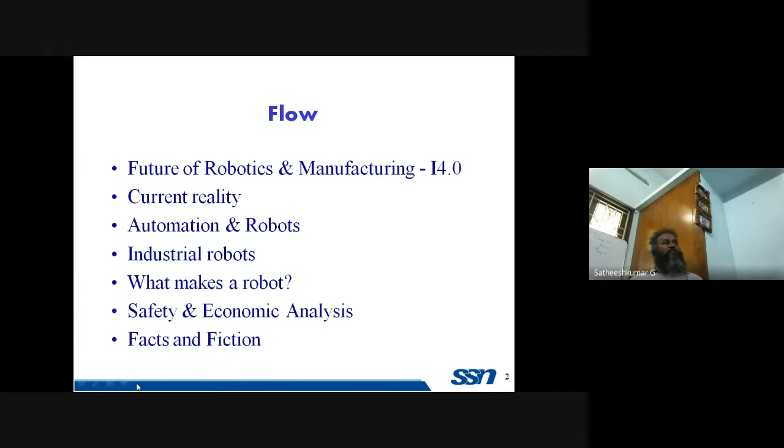Industry 4.0 is the fourth stage of the industrial revolution, which started approximately 200-300 years before. Starting with steam power, we moved on to electric power, then powered by electronics and computers, and now we are at the stage where the internet plays a role in everyone's survival.

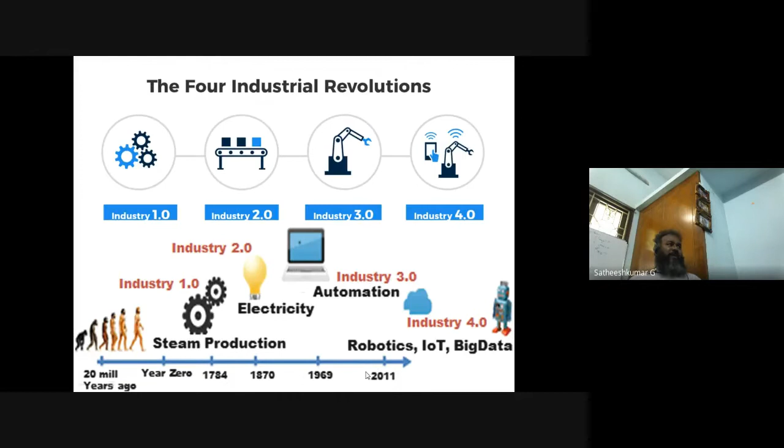That is where Industry 4.0, with IoT, robotics, big data, are going to have a real showtime for these domains. It all started like this—it might even have started even before, that's what they say, but at least 1784 could be considered the starting point of the industrial revolution, and it is extending further beyond now. So what are all the pillars?

They say 9 pillars, 10 pillars—you can have any number of pillars that you want. What I want to point out is you have advanced robotics also. Autonomous robots or advanced robots are considered to be one of the major pillars for determining the success of Industry 4.0.

You will have other things like Internet of Things, big data, machine-to-machine communication, 3D printing, cloud computing. You'll be hearing more and more of this. Of course, your syllabus with which you are studying the subject may not have all these things in place, but 60-70% of this content has to be covered in the next 4-5 years, so that you will have basic knowledge. All engineers who pass out of engineering should have basic knowledge in all these domains.

That is a must. Talking about autonomous or advanced robots, the robots can be fixed or mobile, moving around. If it is going to be moving around, it can be aquatic, inside water, above water, amphibious, on the land—terrestrial, between water and land, or airborne. So there can be all kinds of robots. It is decided by the operating environment and the locomotion capability of the robot.

About the environment, I can go application-based, where it is industrial, service-oriented, non-industrial application—construction, mining, agriculture, even entertainment comes here. Services or defense, this is where India lags; we depend entirely on other countries for our survival. Educational, home, medical—in all these things we have not caught up with the external world.

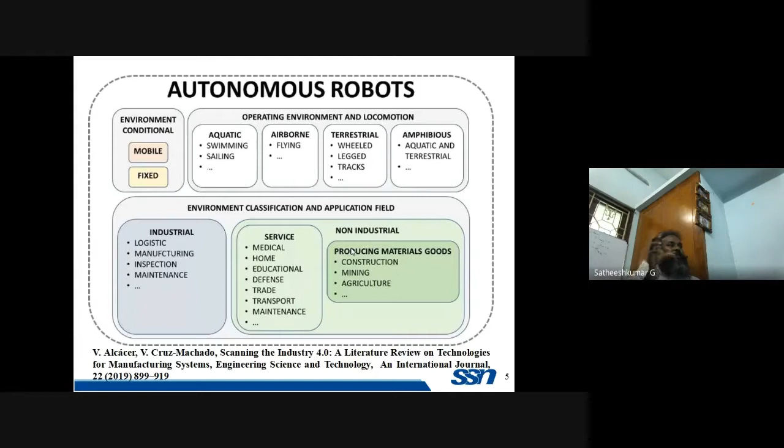Autonomous flight, flying from one country to the other, carrying a specific payload from one GPS location to the next, autonomously. All those things come under autonomous robots. You need the hardware of these things to implement the software aspect of the Industry 4.0 technology. These things are very much needed, these and the machines are very much needed.

This particular slide and 4 or 5 more slides, I've taken from this specific paper. This is a very interesting paper, a review paper done in 2019, very recent, reviewing all the technologies for manufacturing, specific to Industry 4.0. This is a good read, you guys can go through it.

Automation those days, say even 5 or 10 years before, it was only this much. X-axis was having the product variety, Y-axis was having the production volume. Suppose if you are having one type of car to be produced these many times, these many cars, 15,000 cars per month or per year, then fixed automation is preferred.

And if you had more varieties, pens, let us say 1,000 different types of pens or papers or articles, and you have very few different types, and the volume is very low, only one type of pen it is, you have a very costly pen and so on. For that you need programmable automation. Fixed automation, programmable automation, and if it is somewhere in the middle, it is like flexible automation. So all these domains had applications for robotics open. That is how it was.

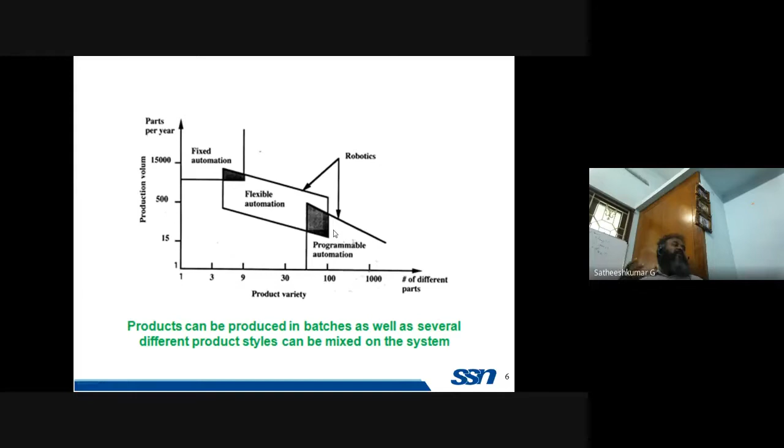The robotics was playing a role, and nowadays this particular robots which played a role in these domains, industrial robots they are called as, they have almost reached a point where it is saturated. It can be called a saturation limit it has reached.

So this automation, the one that I presented in the earlier slide, will have a hierarchy. There will be a real-time application where you'll have controls at PLC level, field level, small machines and components working on its own. Then process level control, plant level control, and finally enterprise level control, ERP they say - on top, a complete company being run from one point.

So even PLC and SCADA will come and fit at this level. Sometimes an extension of that can fit at ERP level also - SAP and other things come at ERP level. So this is like one after other. If there is some failure here, this and this will be completely disconnected.

So instead, if you apply Industry 4.0 technologies, you will have a networked system, not a hierarchy. There is no hierarchy, in fact, everything is connected to the other. So this is like cyber physical system based automation, CPS based automation. Cyber is like the virtual world of internet, or through internet - it can be through any other way also. Cyber is the virtual world, P is the physical world.

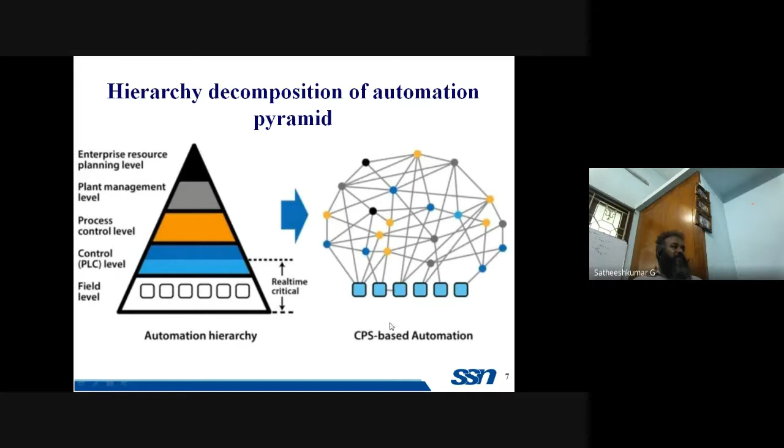This physical world is converted into data representation and converted into a cyber physical environment. If there is a machine in your environment, for example going to fabricate or work with a robot, all this working of the machine with the robot will be transmitted and stored in the cloud, and all the information and data stored there will be the cyber physical system.

The machine might be working here, but equivalent to that, the cyber physical machine will be working in the cloud computing system. Physically here it will be there, virtually that machine will be there in existence. That is how the technology has progressed. All the experiments that you wish to do here can be experimented there virtually, so you don't have to run the machine at all. Just by running and simulating the data, you will know whether this will work or not. Technology is developing to that stage, though it has not yet reached the zenith of Industry 4.0.

We are right now at the starting point of Industry 4.0. One more thing is IoT, Internet of Things. The definition of Internet of Things keeps upgrading every 2 to 3 years. Take the definition of mass, for example - it changed after some 200 years, after Newton and Einstein, the definition of mass became relative, but mass still holds its own definition. But the definition of Internet of Things keeps upgrading every 3rd year. So that is the kind of change we should be ready to sustain.

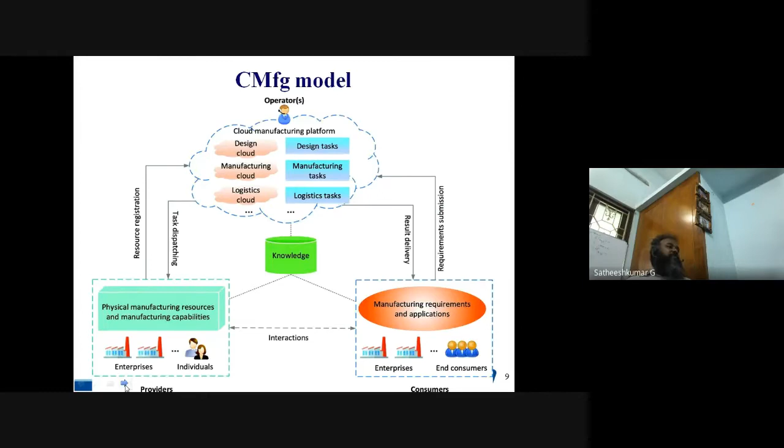So what are all the services that you might be working with? There will be something called internet service provider - even now we have Hathway, Airtel, all these people provide internet service. That is one set of services. The second set of services where mechanical engineers or the existing hardware industry, core industries will be interested is the machine service provider.

And of course, logistics service provider and cloud computing service provider. Between these two, first I'll talk about this. Say there'll be some design task, of course AutoCAD, ANSYS and other analysis that will be done at SaaS level, software as a

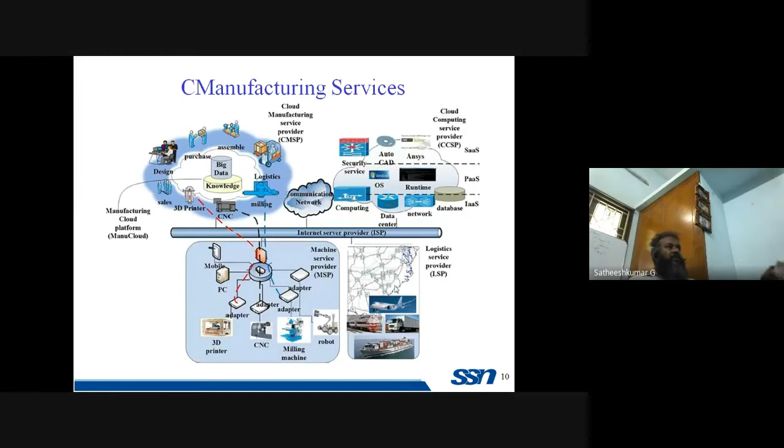Similarly, for a manufacturing company, you should have industrial communication among the components which are there. So there could be a robot, environmental controller controlling the air conditioning system, or machine vision system controls the motion of objects between the different places and machines. And there is a CNC machine, PLC is there to control all these things. All these things will be communicating to the cloud through the gateway.

And there could be edge computing also. Everything need not be done at the cloud. There can be some edge computing. Edge computing is like a pen drive I have, I insert it to my laptop, and whatever can be done at the cloud computing, up to certain extent, I can do it within the pen drive. It is not a pen drive, it has processing power. So such kind of devices are called edge computing.

So this is like one small unit, a manufacturing unit, virtually, in real time, this will be there. So again, with relation to cloud computing, it becomes a cloud manufacturing unit at the smallest scale. Whatever I showed in the earlier slide is the largest scale.

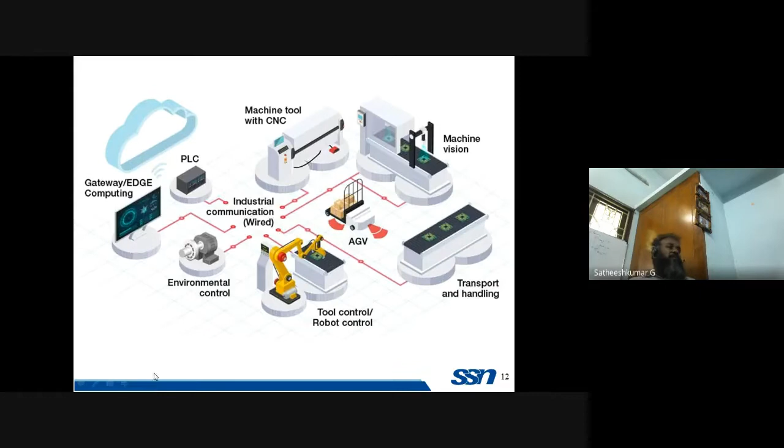And of course, what are all the research gaps for engineers to fill? Mechanical engineers, manufacturing engineers will be talking about FMS to be a little advanced than CIM, computer integrated manufacturing, and even better will be reconfigurable manufacturing system. Automation assembly line was the starting point where we started seeing the intelligence being applied. So much is the research gap here if you have to reach Industry 4.0.

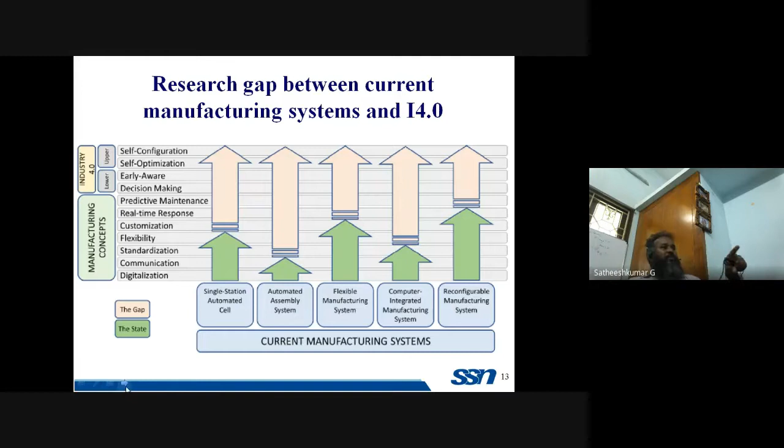So what are all the things that you have to cover? Self-configuration, optimization, awareness, decision making, predictive maintenance, real-time response, all these things. Flexibility, of course, we got it into here and here, which was not there in CIM. So such kind of gaps are also presented. This was also taken from the review paper, this particular slide also.

So what are all the domains specific to simulation research? Simulation itself, like we knew CAD software, we simulate something. There are some simulation software, you create a cartoon and make it work. Such kind of simulation for manufacturing applications is going to play a very wide, vast, in-depth role in the future. This VR, virtual reality, AR, augmented reality, MR, and so all those things will have a very prominent role in the future. For example, ergonomics will have proper simulation tools.

There is a wide vacuum here. So many things can be created. Similarly, process design, verification, planning. Yeah, so much can be contributed. Of course, there are good softwares available for simulation, but to integrate, they are still developing. This is a very huge domain for individuals to work on. Say material flow, robotics, product design, it is a very fertile field. All these things will have simulation as one end of it.

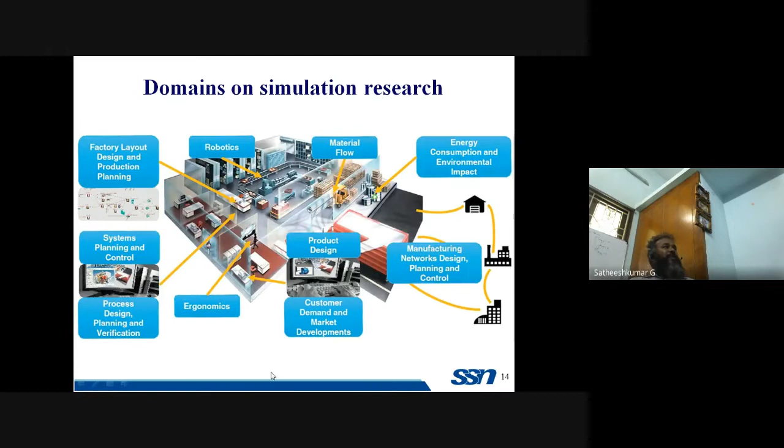You might say it is just energy consumption. Yes, I need a software because virtually I want to check before I start running the manufacturing unit. I want to virtually check by running this particular plant, what will be the energy consumption, what is the environmental impact, and so on. So this knowledge into these domains is very much needed, very, very much needed.

So when I connect augmented reality to that, I will have an equivalent mobile, say on the hand. I can have two mobiles, one on my hand and one on my virtual augmented reality tool. Through my mobile or laptop I can create one more mobile virtually. So such kind of things are possible.

So I need not talk now, because the data that you generate is the lifeline for the cloud manufacturing unit or industry 4.0. Data is the lifeline. If you remove data, everything will fall like a 9-pin, you won't have anything standing. Maybe our robots and machines might stand, everything else will collapse to the ground. So data is the lifeline, and they are going to present their data life cycle in this.

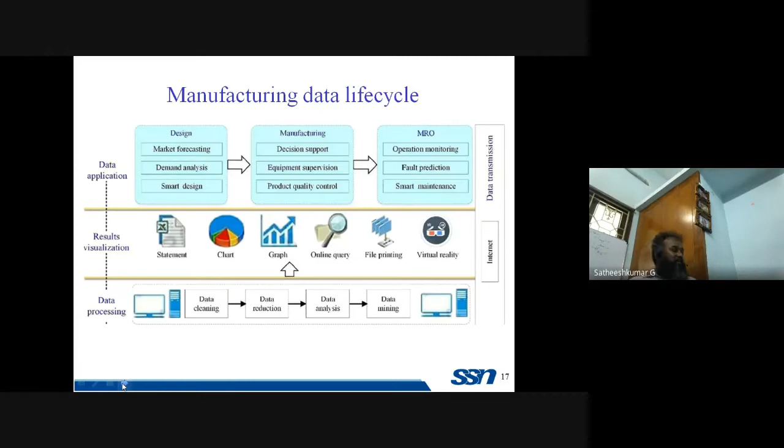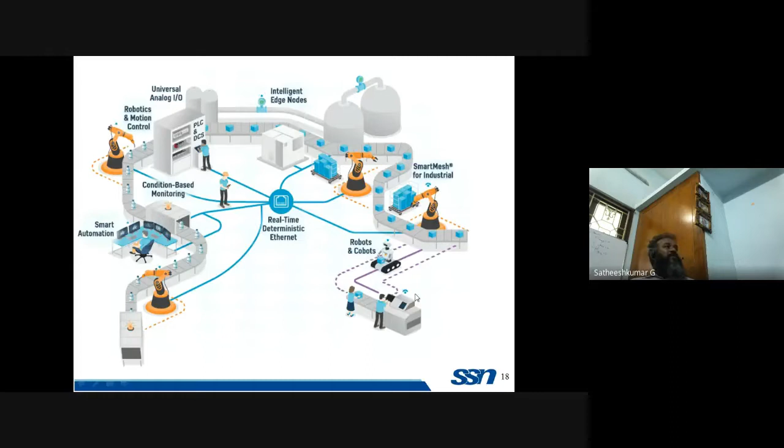I think I've spoken a little more than 25 minutes, so I'll just move on. I just spoke about the future, this is how it might appear. Everything will be connected through the internet. So this is the GIF that is depicting it.

So we have talked about manufacturing. I'm going to move a little towards robotics. But before talking about robotics, how about smart... cities?

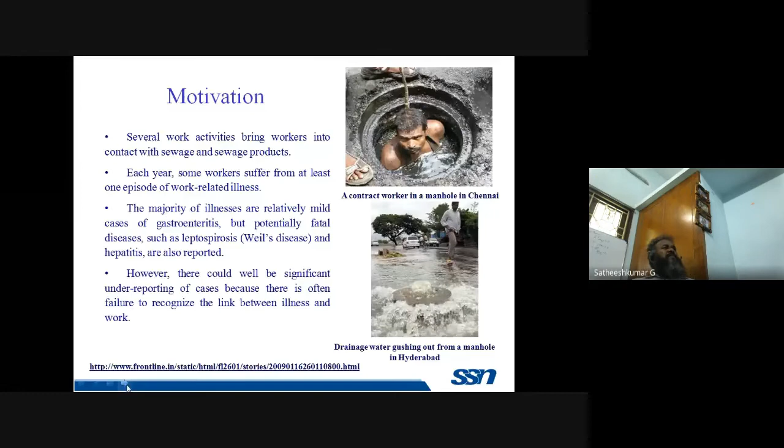But is that the reality? Not so much. This is like happening in our own country - this is a common scenario. So I'm just showcasing one particular example for which we worked on developing some system.

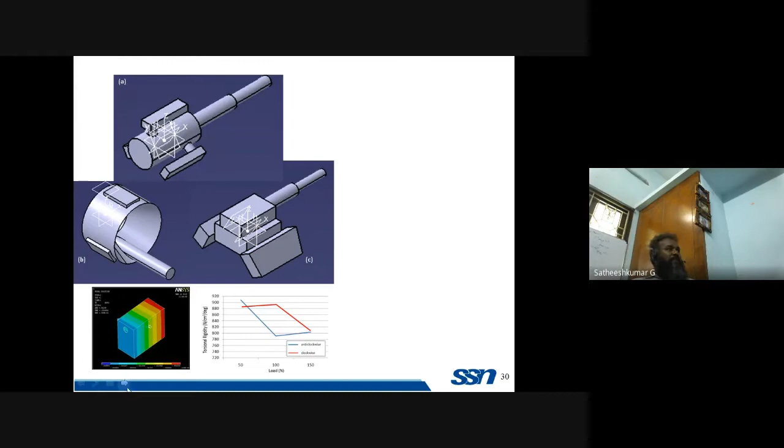Initially we created these models, did some analysis and experiments, did some analysis, and came to this particular design, and with some more improvisation came to this final design. This is like an umbrella model which can open and close and accommodate itself to the changing diameter of the sewage pipeline. Sewage pipelines start from 30 centimeters and go up to even 1.5 meters and beyond - there are places where 2.5 meter diameter pipelines are also there, though this design is not meant for that. This is specific to Chennai pipelines, underground sewage pipelines. So this design we did, and all the software analysis that we did.

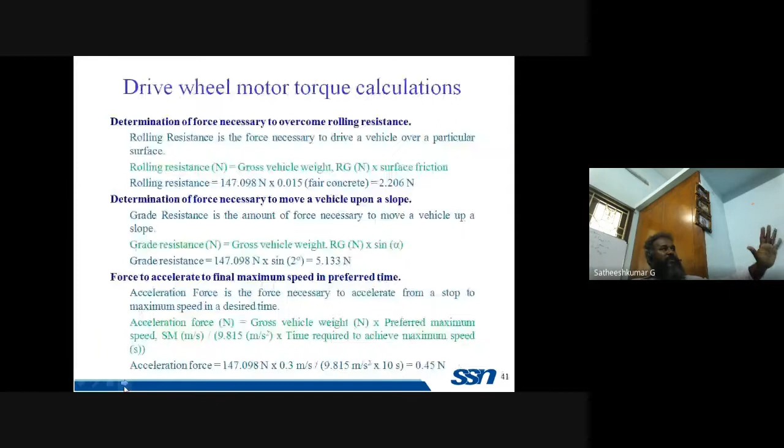In that, I want to talk about robotics and manufacturing - the role I'm supposed to talk about. So that particular robot which plays a role in manufacturing, how it is designed is what the next 2 or 3 slides will talk about. So physically, I told you how I manufactured it.

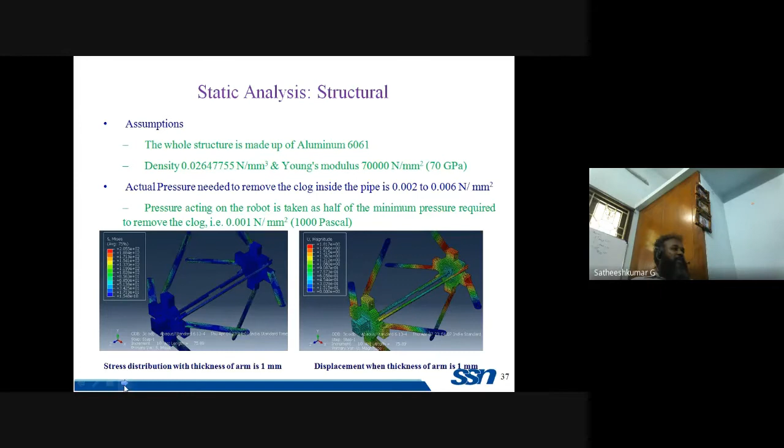I did some software analysis, some static load analysis - I looked at stress, strain and displacement. I increased the thickness of this plate and measured again, and measured again. That is the advantage these software give - structural analysis.

Having done that, I moved on to kinematic analysis. The robot is ready. So suppose if I want to move this particular wheel from here to here, what is the number of rotations the motor I mount here will need to rotate for this robot end position to reach from here to here. Similarly here to here - there are 8 wheels on top on all the sides. So for that I need kinematic analysis of the robot to be done.

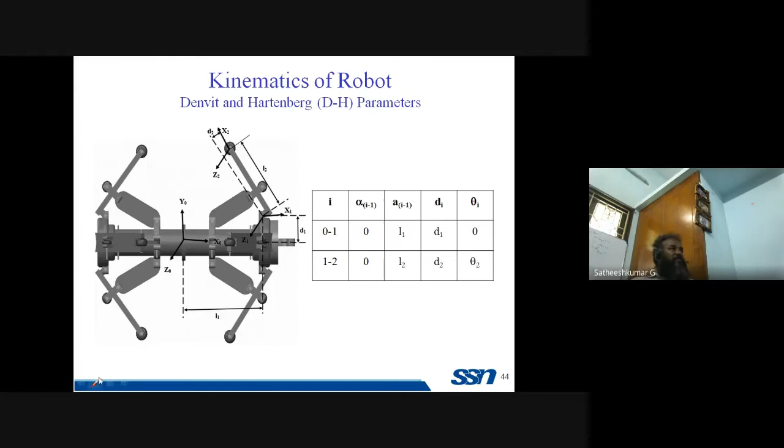So for this industrial robot, for it to move from here to here, I need to find the instantaneous position, given as X, Y and Z in space. That will be related to the joint positions theta 1, theta 2, theta 3, and this vertical axis also will rotate like this, so theta 4 - 4 different rotations. When I combine them, I'll get a motion from here to here. So such a complex mathematical model is running in the background, for just one robot.

For that I'll be fixing these kinds of coordinates onto the end effector, onto the joints, because joints are the places where the motors will be fixed - the endpoints of the motors. So from here to here, what is the transformation? From here to here, what is the transformation? From this coordinate to this coordinate, what is the transformation? I'll find it from one coordinate to the next, and so on and so forth, and finally I'll know from the base coordinate where the tool center point coordinate is. I can move it mathematically - that is the advantage of kinematics, within the robots I was talking about.

The robot is not going to work alone. There will be a work environment where a work table is there, say an object is kept. So there is a coordinate system. The robot should know where the object is with respect to the table, and this object with respect to the base, and this robot with respect to the world coordinate system.

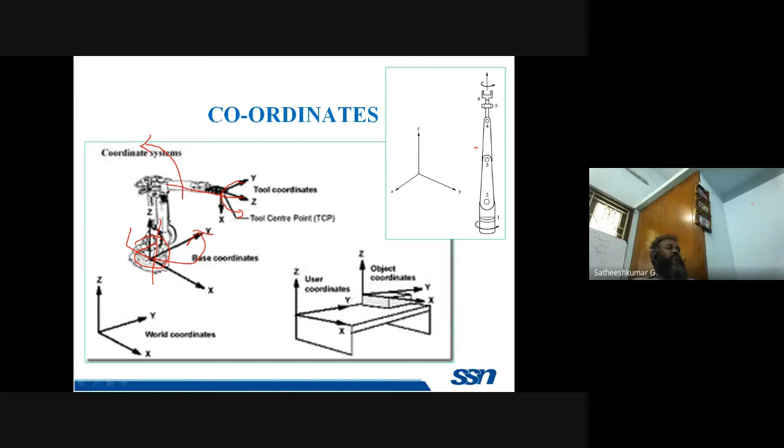But what happens is at the base also, this particular base was helping me roll it initially in this vertical direction. So this was acting in one direction, this rolling was happening in a different direction. But when I keep it in the same axis, both rolling motions are converted into one rolling motion. So the robot loses 1 degree of freedom.

So what happens when losing 1 degree of freedom? It is just doing the same job, you might say, but mathematically, there will be a bomb dropped into the kinematic equation. The equation might be completely demolished. It will be confused. Your robot might start acting weird. It might go hit other things, hit the bottom, or throw things, whatever it is holding. So such is the complexity.

These kinds of losing or gaining 1 degree of freedom will cause issues to a robot's kinematics, the working of a robot. That is called a singular configuration. This also you can find out mathematically. An analysis called Jacobian analysis is there, with which you can predict even before reaching the point. You can predict, if I go there, there will be a singular point waiting for me. Avoid that path, and your kinematics will take care of moving through a different path. So such is the kind of analysis kinematic analysis gives.

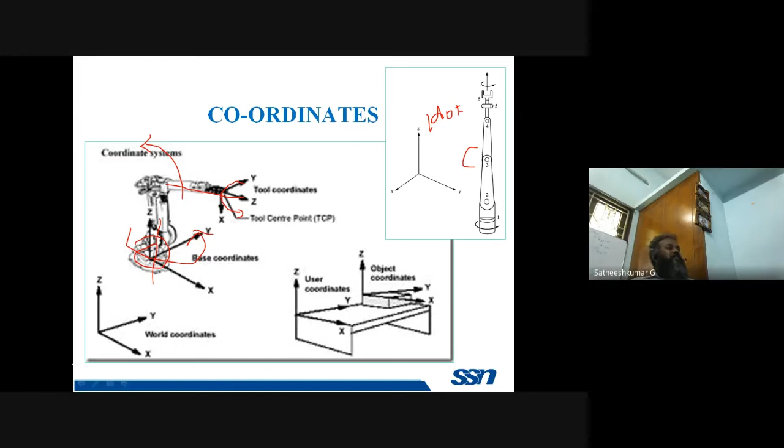All these things, all this analysis, for every robot in the industry, such kind of analysis is done, and that mathematics will be loaded in the controller. Here is the controller, a box which is there, which will have so many electronic components.

For each motor, you need a driver. All those things will be fixed there, and power supply has to be converted. If it is electric motor, it comes through this and comes here. If it is hydraulics, it comes through this and comes here. If it is pneumatic, accordingly different motor drivers will be placed here. And you have a teach pendant also to program a robot.

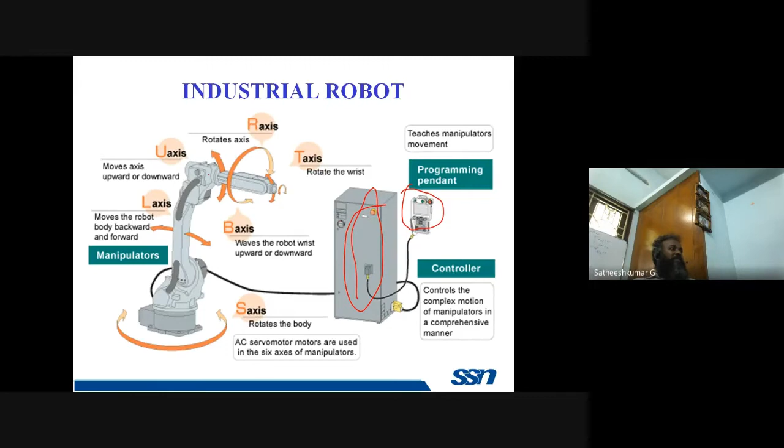So these kinds of devices will be there in the control unit for controlling. This is like a fully digital controller. So these kinds of components will be there inside, and for each motor, such components will be there. These things will be stacked inside, one for each motor, and so on and so forth. There might be a number of sensors here that also will be controlled by this. There will be other things, say beep sound and light, all those will be controlled here.

That controller, that algorithm which I said, that kinematics algorithm, will be entered here. So this will be taking the kinematics algorithm. So suppose if I have a robot which has like 1 wheel, and 2 wheels, it is balancing on 2 wheels.

It can tilt forward and backward. So without falling, it should move forward and backward like an inverted pendulum. So if it is going to fall this way, I mount a sensor from the vertical. What is the angle? I'll find out, using an inclinometer or whatever - so many angle measuring sensors are there. Based on that, I will say move the vehicle, move the wheels forward. So that kind of algorithm will go here. If it is going backward, move the wheels backward. That is the controller algorithm - here, the kinematics algorithm will be there. Kinematics is like if there is an arm like this.

So how much this side should move and how much this angle I should move, both the angles, for this arm to move from here to here - that kinematics algorithm will be here. So I'll take feedback, do the error correction, and control it. This is what goes into a controller, all these things will go into a controller.

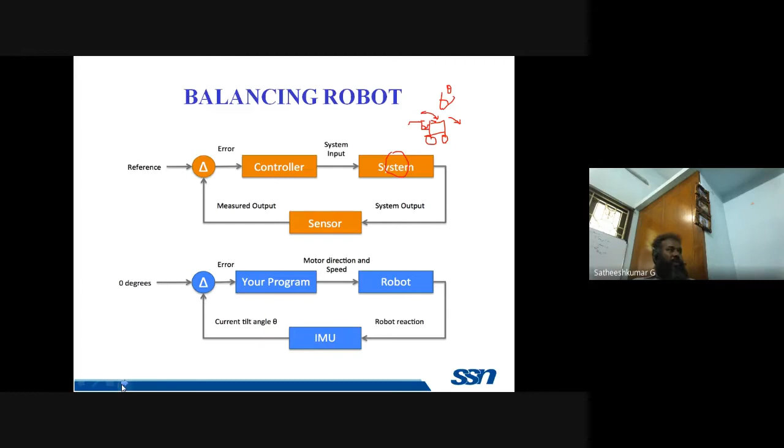For my sewage cleaning robot, this was the control architecture. I cannot discuss any further on this. It's 10:45, okay good, so we have gained some time now.

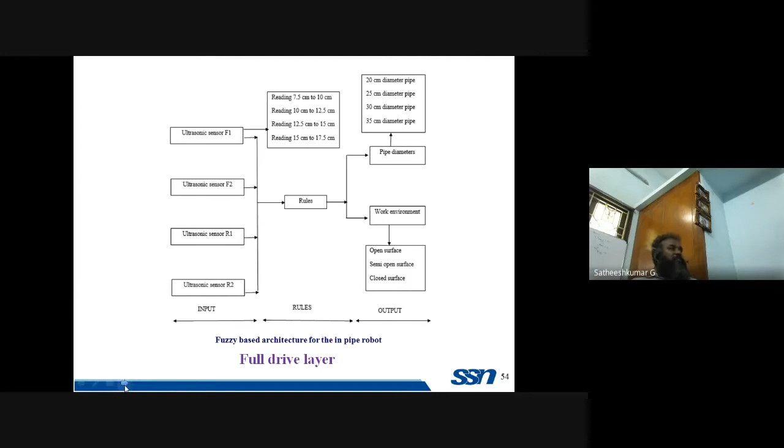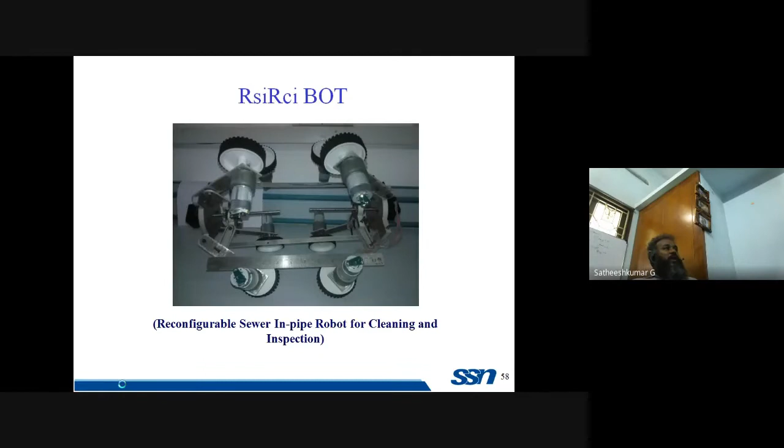So these are all the studies that we did and the fabricated components for that sewage cleaning robot - the assembled one. The idea is, in Chennai there is some 7,000 kilometer network of sewage pipeline under the ground, under Chennai alone.

Can you guess what 7,000 kilometers means? 2,000 is approximately the distance between Chennai and Delhi. So 7,000 kilometers of sewage pipeline network are there beneath Chennai alone - you can assume similarly for the entire country. And 77,000 plus manholes are there within Chennai.

So assume these circles as manholes. This is Chennai, and manhole to manhole, pipelines are connected. What happens is, whenever there can be a clog in the manholes or in the pipelines...

For manholes, they know how to take it out easily. Humans generally should not enter - they use the bucket machine, they just loosen the bucket inside, grab the filth from inside and throw it out. That way the entire manhole, which is like 6 meters deep and 2 meters wide, can be cleared.

But if there is a clog in the pipeline, which is like a 30-meter pipeline sometimes - the diameter is too small there - what they do is use something called a jet rodding machine. They bend the jet rodding pipe and insert it here. High pressure liquid is sent inside, and they expect this to be cleared.

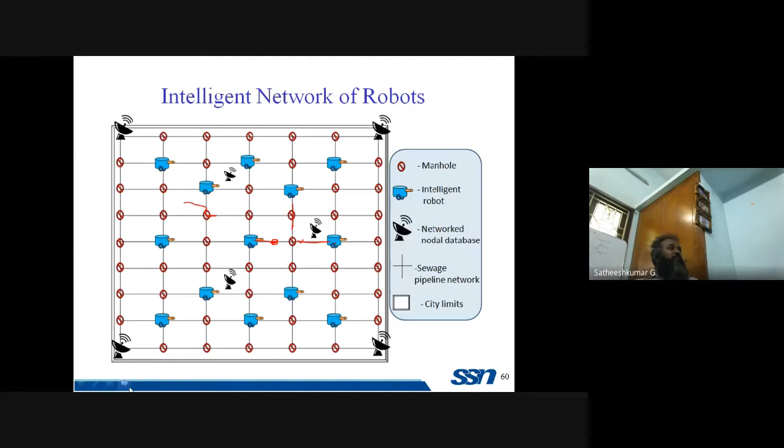And of course there might be sensors mounted at these places, Internet of Things kind of sensors, which will also communicate to the robot - saying there is pressure developing here, come and check. So such kind of thing is what we are aiming at. We got funding from DST for some 40 lakhs, and we are working on developing a complete system.

And what is mechatronics? How are they different? Both are intelligent systems. What is the difference? Mechatronics and robotics is almost the same. They are interdisciplinary subjects. How are they different? And what is automation? How is it different? How are these three things different?

Okay, so for mechatronics, let us say I create a device which will open and close my door. Here is my door. When I come and stand here in front of it, a sensor senses my arrival and it opens the door, then closes it. Only one small link or arm is there - it just opens and closes. So that I need not call it a robot.

If I make a humanoid robot, and this robot walks and opens the door every time I come, every time I roll up, that is a robot. Or if I take a complete arm and fix it to the wall, and use that to open and close, then it becomes partially mechatronics and partially a robotic project. Otherwise, everything is one and the same.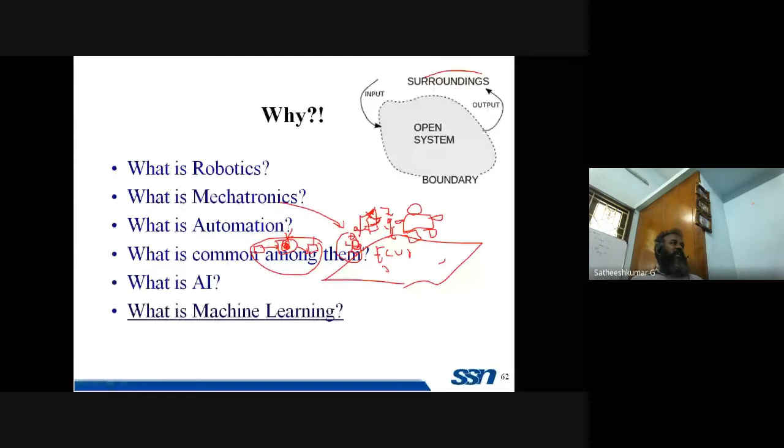That's okay. So we have discussed what is common, and what is AI. This particular intelligent unit, this particular intelligence - here is the intelligence I'm giving: if this comes, do this, is the intelligence I've written here. So here, if I bring in a supercomputer or a highly advanced computing chip, with heavy processing capacity, too much data, too much calculation, logic into this, then this becomes artificial intelligence. So this will be able to decide things on its own. It won't wait for a human to tell it what it should do. It will start deciding things on its own.

That is AI. And that AI, if I am writing the code through a computer, through the keyboard, typing some code and using a mouse, I'm typing it - so the program is able to calculate A plus B is equal to C.

Okay, this is like a program which I created. This is intelligence. That is not maybe the basic level of artificial intelligence.

What I'm going to do is I'll give it so many examples, like 3 plus 7 is equal to 10, 1 plus 2 is equal to 3, 700 plus 1000 is equal to 1700. Like that I'll give some examples to it, so many examples. Data I'll feed it, and some algorithm I've developed, based on which it will say next time when I supply what is 7 plus 3, by itself it will tell me 10. I didn't program it to tell me it is 10, but I've just fed it with the data, giving all the examples for addition.

Or say this image has a cat. All the 1000 images that I'm supplying has a cat. So it will know, like when I supply a new image, it will say there is a cat in this or there is no cat in this, on its own. Such kind of algorithms are called machine learning algorithms.

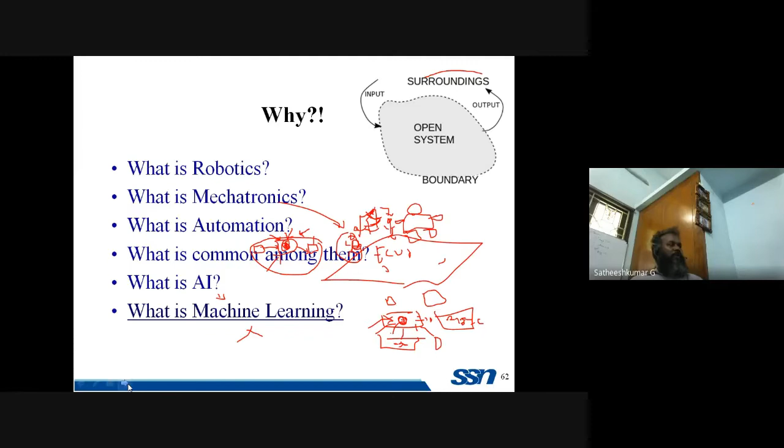It will be interesting once you know some basic C programming. You can learn Arduino programming also. You can control Pi and other softwares, and you can learn about artificial intelligence also. There are so many free courses available, on NPTEL and so on. You can learn, or on internet also. So you should learn, better to learn.

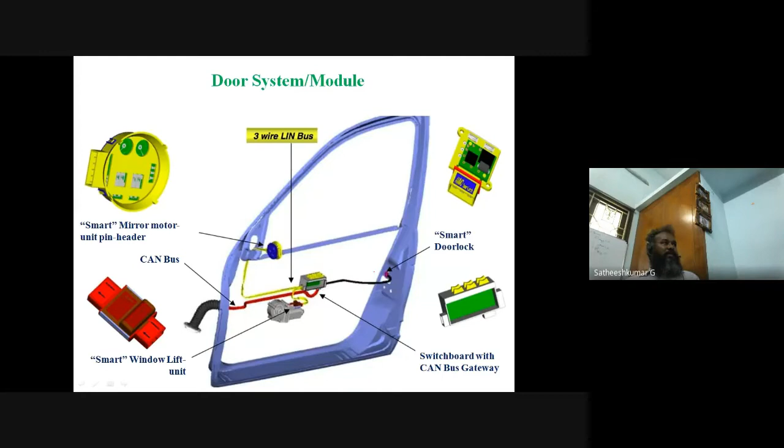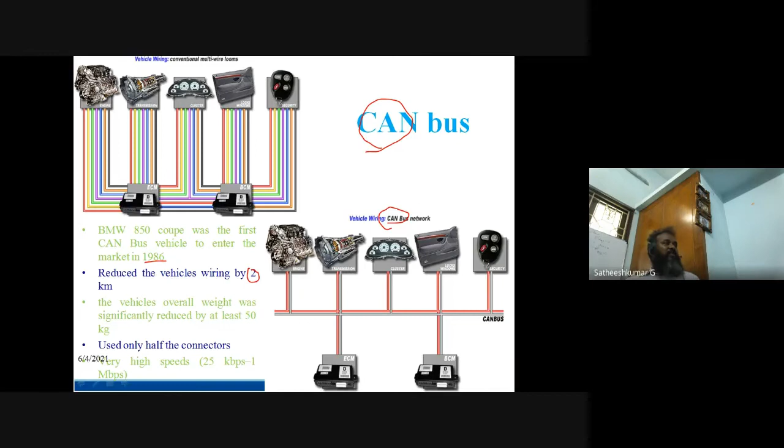How am I connecting this wire? That is done by some CAN bus controller, CAN bus protocol. So two protocols are there: this is like a conventional multi-wire protocol, and this is CAN bus protocol. All are the same system connected. Just by adopting CAN bus protocol in a particular car, BMW 850 Coupe, in 1986, the total wiring distance was reduced by 2 kilometers in each car, leading to a 50-kilogram reduction across each car. So such is the advantage these kinds of technology bring in.

And say suppose if somebody writes it here like this, how will you be able to read? Say there are some answer sheets which we correct during evaluation time, where at least somebody can read like, this is R, somebody can tell, but somebody will write something like this. So whether it is X or Y or R or what it is, we cannot tell. There are answer sheets which will have such confusing answers, but AI will tell us. Once you train the artificial intelligence, you keep training them with such kinds of papers, thousands and thousands of papers, and whatever way you write, it will tell you clearly, give you such black and white answers. This is what you have written.

You cannot cheat the AI. Human beings, say we are supposed to correct for 3 hours, some 25 sheets or 20 sheets. So when I reach somewhere around the 18th paper, my eyes will be almost half closed. I have to relax and come back to finish the rest. But these AIs and robots, they'll be working for years together, no rest, only mechanical wear and tear or some maintenance work. So these people gain advantage from all these things.

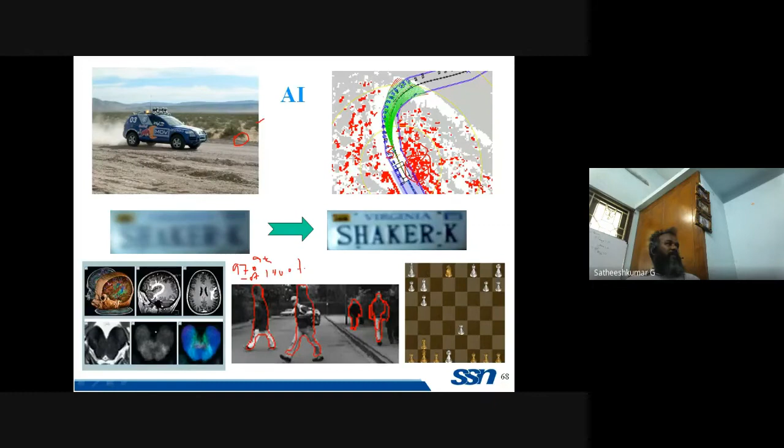Even the best doctor can get accuracy of 96 to 97%, but only with AI and humans put together are they reaching 100%. AI also stops at somewhere around 98 or 99 point something percentage accuracy with current technology. Together they are getting 100%, man and AI working together.

So what is the time? It's 11. Okay, half an hour more is there. Probably I'll just go through.

This is like you might have read it, Laws of Robotics, created by Isaac Asimov. He is considered to be the father of robotics by some researchers. In his collection of short stories, I, Robot, he proposed the laws of robotics. Three laws he proposed, and a zeroth law was added later.

It says a robot should not injure humanity. And similarly, a robot should not injure a human. A robot should obey human beings, that is the second law. And a robot should protect its own existence. So now the condition comes: if a human commands the robot to hurt another human, that is in conflict with the law that it should not injure a human, but it's also saying it should obey orders given by a human. There will be a conflict.

In that case, it says such orders should not be in conflict with the higher order law. So if both conditions apply, the higher order law prevails. If there is humanity on one side and one human on the other side, whom should I save? Go for humanity—this one prevails. So such is the kind of precedence that they are giving.

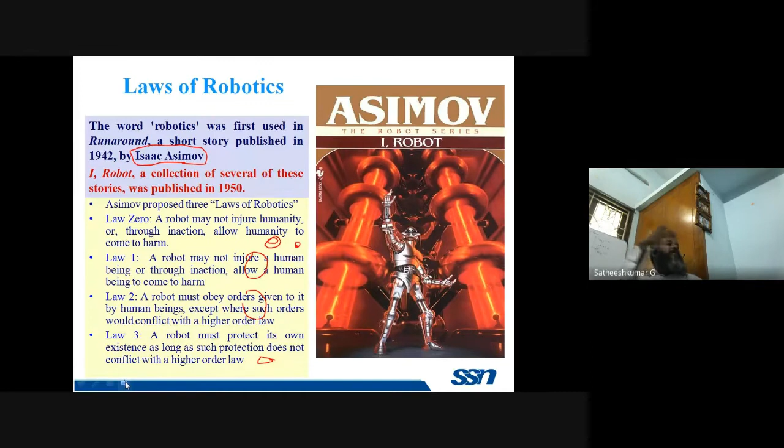There should be a time where these things get forcefully implemented. We need a world leader, or a human, who will go implement and get things in place—like a UN, United Nations, which is specific to humanity. So technologies don't have control at all.

So every robot, as I said, there will be a mechanical component, sensors, electronics, and the brain part also. So equivalent to the motors, you will have actuators in the robot. Equal to the frames and links, you have the skeletal structure in human beings. Equal to sensors, you have...

Suppose if you don't have a skeleton, can you imagine your body shape? What will be the shape of your body? Anyone can respond? Just wanted to hear it from you, and how you guys think about it. If your skeletal system is not there, how will your body be?

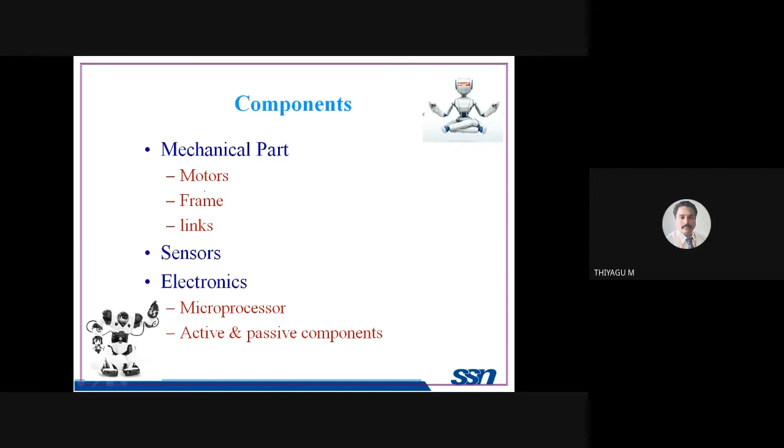Our body won't be stiff—you'll be like an amoeba, a lumped mass of flesh. If you had seen the movie Blob, B-L-O-B, released in the 1970s, you can see such kind of things. It was a very interesting movie; in my childhood I've seen this. So think about Aishwarya Rai or any model walking the ramp—like if we had been created like this, without a skeletal structure.

So such is the importance of the skeletal structure that it offers for the robots also. It gives mechanical advantage. So if I have to lift a weight here, I have to apply so much torque multiplied by this distance. Only then can I lift a weight. So all those things, these structures provide, okay?

And sensors—how many sensors do we have as human beings? Yeah, 5 sensory organs. How about the 6th sense then? People keep saying 6th sense. Yeah, that is intuition—putting them all together.

And then how about the 7th sense? Even Surya acted in that movie. What is that? Extrasensory perception, okay, that is for fun, or it might be real also. Some people who play chess will know when somebody approaches them—99% they would have detected this is the reason why this guy is coming to me. I've experienced this, so probably I can quantify it as an ESP and so on. Forget that—there are thousands and thousands of sensors available as an option for a robot.

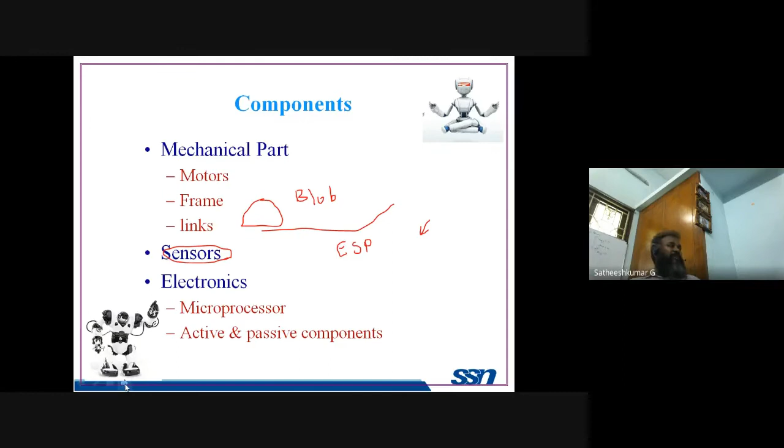The microprocessor is in your laptop. The microcontroller is in your microwave oven, washing machine, and so on. In your mobiles these days, it was microcontroller once, but now microprocessor is also taking its place.

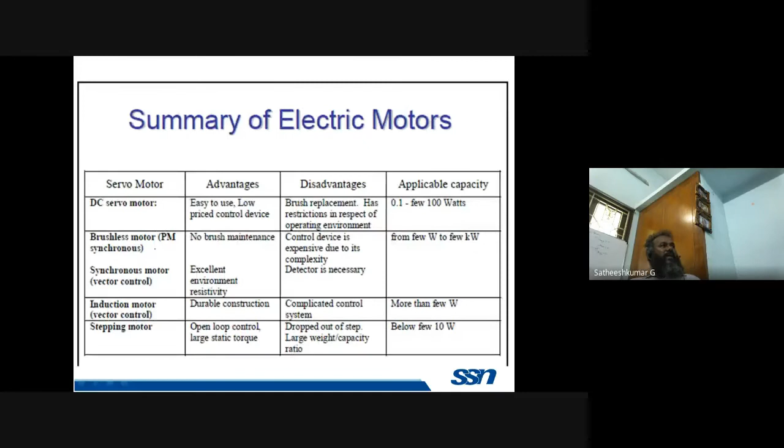Different types of motors are there - electric motors, pneumatic actuations are possible, and hydraulic actuations. Long before, most things were hydraulic. The advantage with hydraulic is it will be very compact. If a large load is to be carried by a smaller motor, hydraulic will be much smaller compared to electric motor, and pneumatic will be a lot larger, probably equivalent to electric. So for lifting a large load, hydraulic will be the smallest.

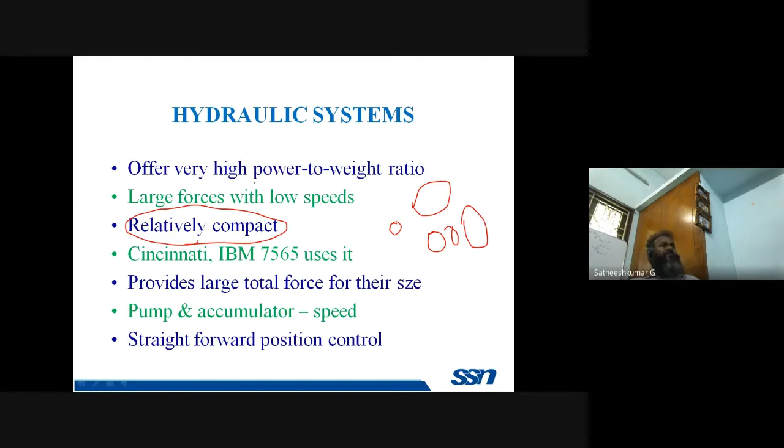Such a high power to weight ratio is offered by hydraulic. Each will have its own advantage and disadvantage - there will be a leaky environment with hydraulic.

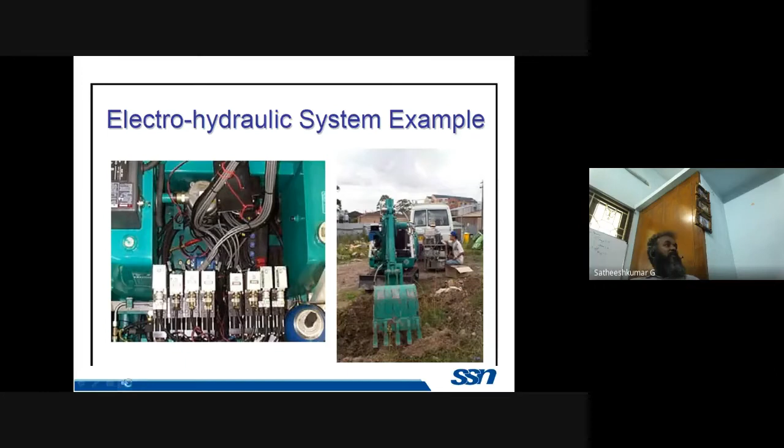So they brought hydraulic and electric together as electro-hydraulic, and these days piezo, shape memory alloy, MEMS actuator, nano actuator, pico actuator, even molecular actuator - I think they might eventually say electron level actuator, photon level, subatomic level actuators. They'll keep going, there is no stop, maybe even string actuators. Technology will probably go down that line, but as of now we are here.

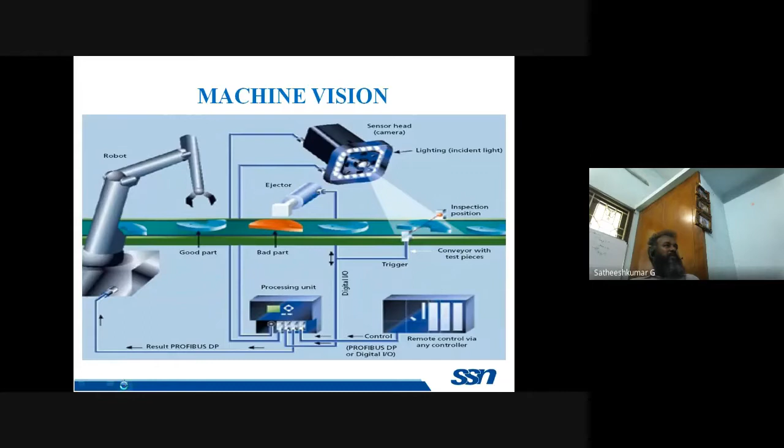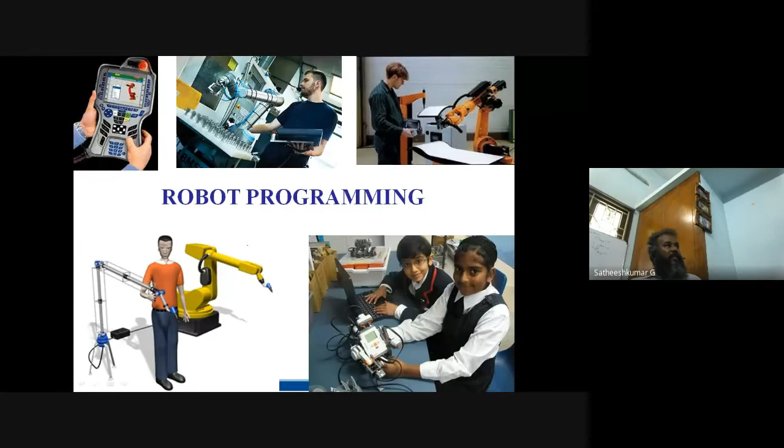Where robots are being used in the manufacturing industry, and how they are programmed - programming can be done by holding the robot like this. You can hold the robot and move it. If there is spray painting or painting to be done, you just move it with your own hand as an expert painter, and that will be automatically recorded.

Otherwise you can have a teach pendant, with a set of buttons and toggle switches. With this you keep moving, and the robot will keep demonstrating as you move. You want to move from here to here, you achieve that, then save this program and run it 100 times - it will keep running from here to here. This is teach pendant based programming.

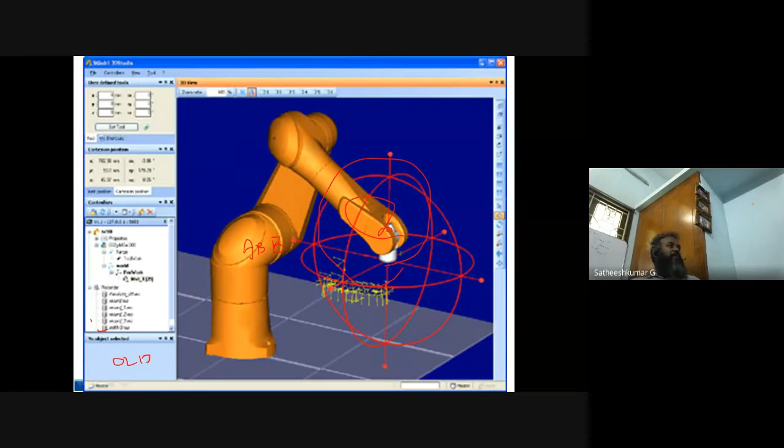There are computer softwares available. For a standard industry robot like ABB, you can download this robot tool from an internet library and make changes. Make it move from this point to this point, make a circle or a spiral, and that program will be saved. You can download that program directly into the real-time robot, and the robot will start drawing the spiral trajectory. These are called offline programming, possible for manufacturing applications.

How about more than 2 robots, or other machines working together in the industry? All of this is possible in offline programming and work cell simulations. Many very good tools are there so all these things can be put together and made to work in tandem.

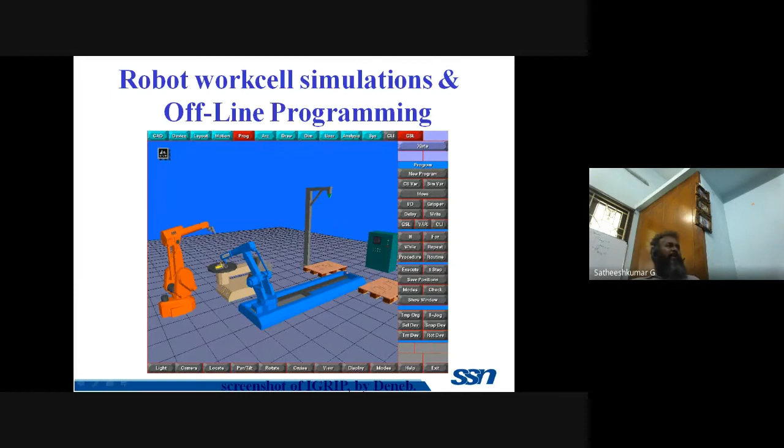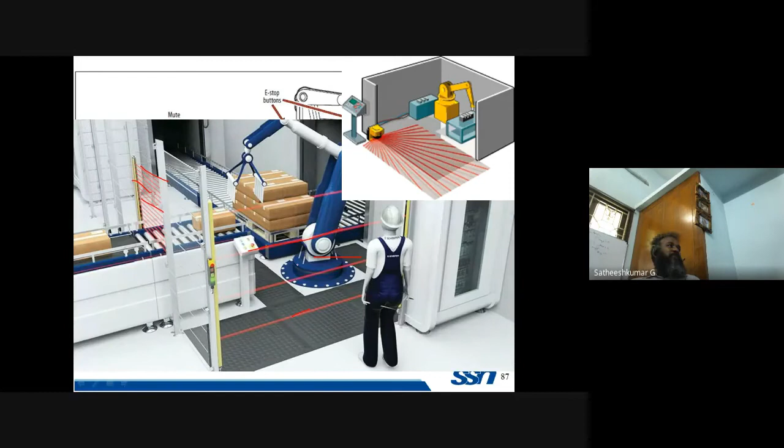In work cells there will be proper sensors for humans - if they enter, it will be immediately sensed and the robot will be switched off. There will be an electrical fence like this, you can see fencing here and here. Neither the robot should cross this line nor should a human cross this line when the robot is in operation. Such advanced training is there, even for individual units like AGVs, which also have so many sensory parts on them.

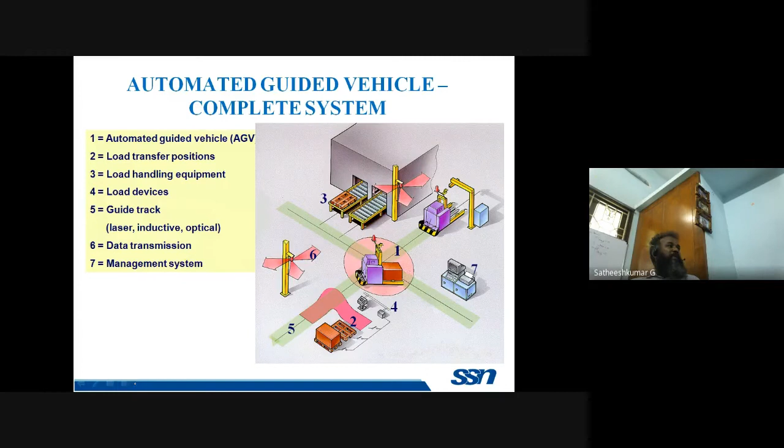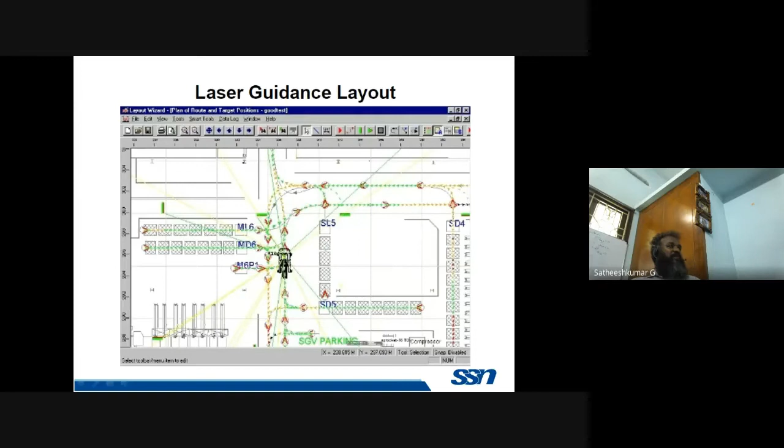There are even tools for guiding the path for the AGV within a huge industry. Laser guidance layout. All these things are like the trend.

So this is for AGV, you guys can go through it. Some of you might argue that if I'm taking all the jobs from human beings, won't we be jobless? Won't we be increasing the unemployment?

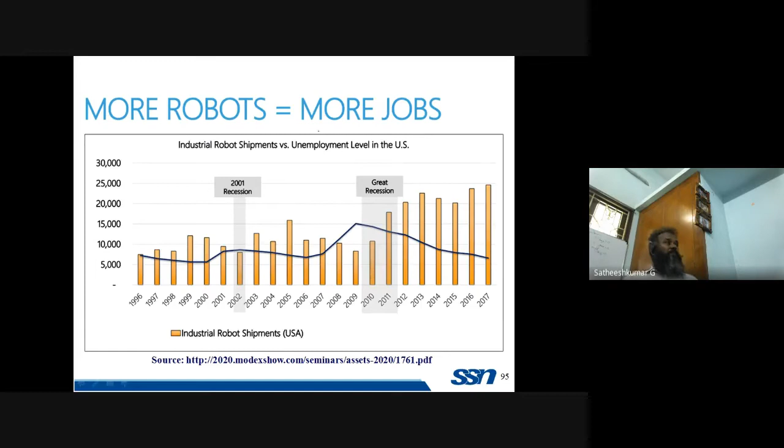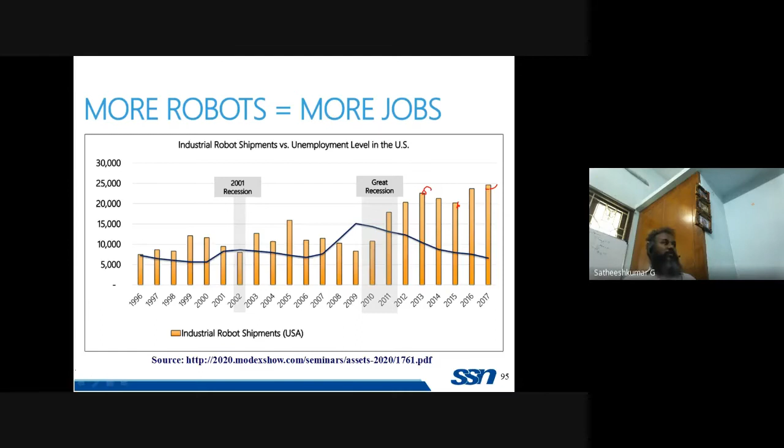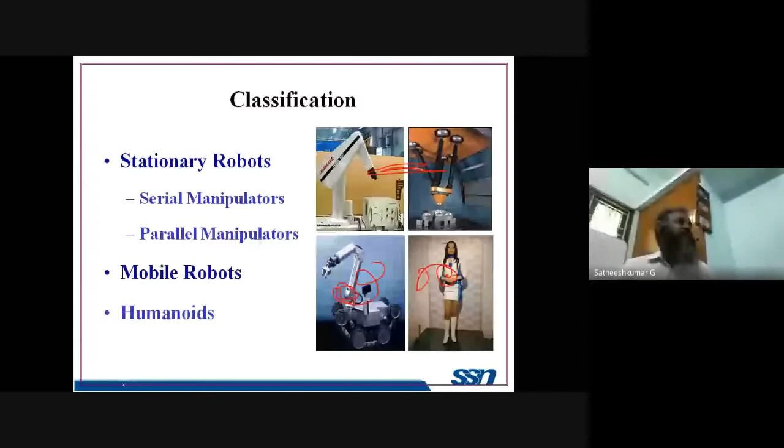Humanoid kind of robots, each has got its own role. These things I'm not going to talk about much, there are so many different types of humanoids.

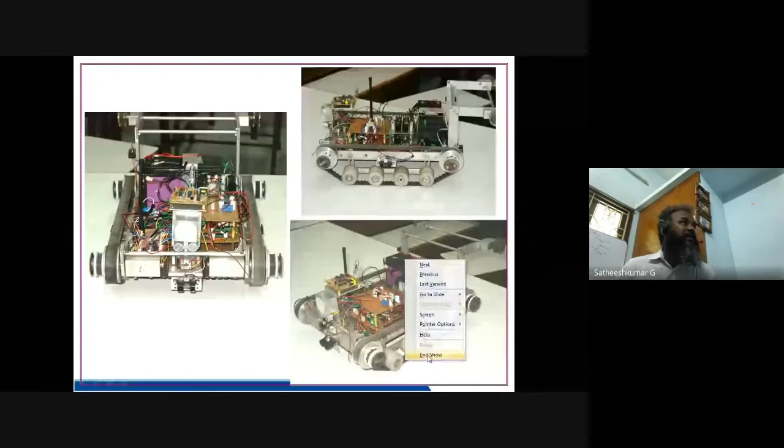Okay, this is specific, this is my own agenda. I don't know whether Thanikachalam sir will be happy about it or not, but this is going to be beneficial for the students or for the people who are here. Don't worry, it's about some project ideas and how you can lead it to patenting. I'm going to rush through because so much is to be conveyed.

So what we do is, I'll just show one or two videos. Can you see the video now?

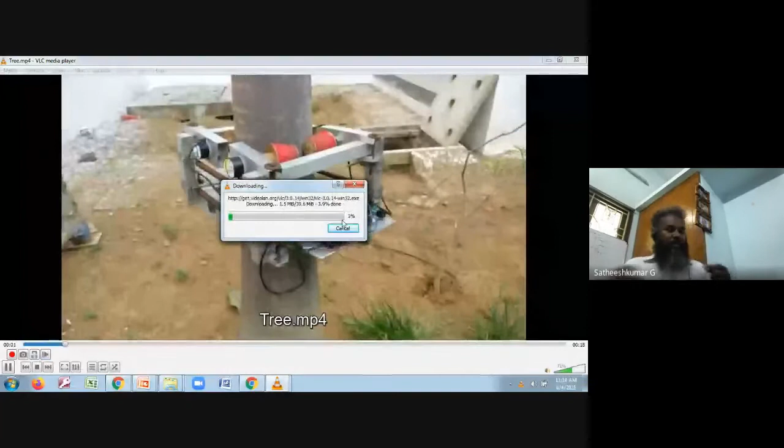Can you see the video? Yes sir. Yes, yes sir. Yes sir. Okay, okay.

So this is done. It didn't show, something happened and it went off I think. So I'll go back and try running it, play with VLC.

Probably by now you got an idea what I was trying to show. No.

Okay, how about now? Now it's good. Now it's good. Okay, I'll just play the autonomous robot thing.

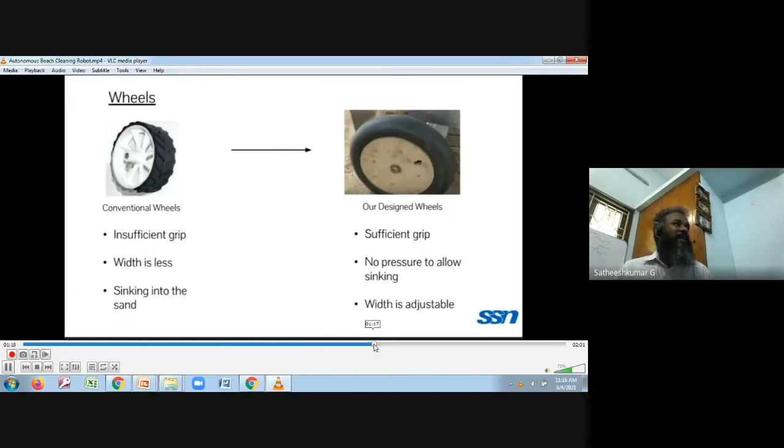This is like the wheel design. These kind of wheels didn't work for them initially, it took a long time for them to understand. So they made such kind of wheel, like a tube, over all the mechanical design, and they used a mobile to capture the video. It's a very rudimentary design, not hi-fi, but something worth it. They did it.

What else did I want to show? Quite a few things, probably I'll come back and show. I'll just go back to my PPT. What else? Beach and mosquito. Mosquito, I'll tell you what is the mosquito eradication robot. Is my screen visible again, the PPT?

Yes, I'll just give a glimpse about these things. The mosquito robot will go around the house, stay at each corner for 1 or 2 minutes. It'll observe the sound generated by female mosquitoes - there is a difference between the frequencies for male and female - and it'll suck the mosquito in. It won't kill it inside; the mosquitoes will be living there inside the box in a cooled environment using the Peltier effect, and they'll survive there.

They'll live their life and die inside, it won't come out. We don't kill it. For karma, we want to work differently, like the swat and other things where you kill them - once each hit will kill 1 or 2 mosquitoes. That is not done here, it dies on its own.

So here you can differentiate the schedule - what kind of schedule you want to make it go around the house and so on. How to attract the mosquitoes? CO2 is the means. CO2 is created in an eco-friendly manner, and it comes, the mosquito comes, and it captures it.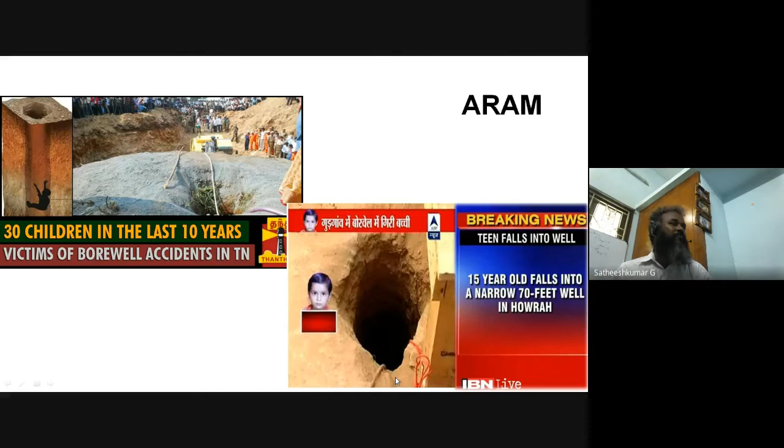So there are a number of problems in society. Say people falling into deep bore wells - they cannot be retrieved. Any attempt that they do, the mud will slip and fall inside. Just think about yourself stuck inside 70 feet down, nobody to help you. Are we not supposed to help these kids?

So this kind of filth which is floating around in our country, on the beach, on the road, everywhere - why not some small technology, some 1,000 rupees, 10,000 rupees small robot? Some 10 people put in 1,000 rupees each, make a robot, let it keep cleaning on the road, on the beach, everywhere.

All these things - these people need our help, not from a position of 'I am a better person trying to help them,' not like that. We are humans, we are supposed to do this. They are better than us in so many ways. Take this person giving lectures world over - he earns more than any of us can earn. Such kind of people are there, but still, are we not supposed to create technology?

I've seen a madam at IIT Madras - there was a road and she was going front and back, not getting down to go to her department on a wheelchair. You would have read about her in your CBSE books, she's in the chemistry department I suppose. I was asking her what happened, ma'am. She said they had increased the thickness of the road, and she's not able to get down with the wheelchair. The thickness was just 1 inch - I've never even thought about bothering with 1 inch. She was not able to get down, she was fearing that she might topple over just 1 inch. Such is the kind of difficulty they all face. We are supposed to think, interact with them, and find solutions for these kind of people.

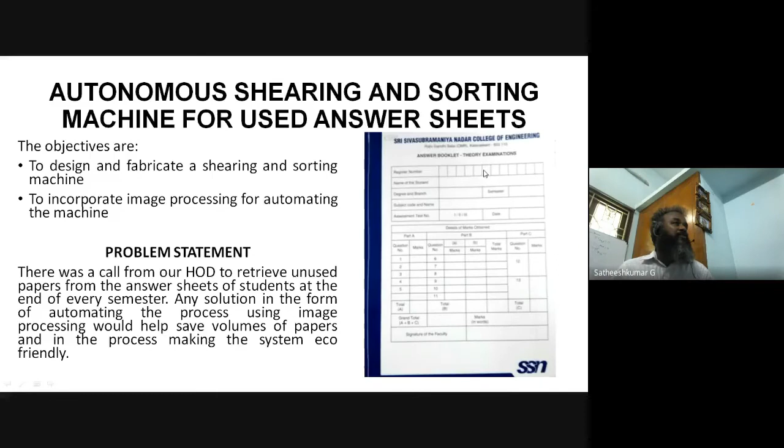Say these answer sheets - how many sheets will be unanswered? You'll just throw it, recycle it, it gets recycled. I suppose if I make a small machine which will tear out all the unused papers, that is going to be useful, right? Some small technology - our students, they did it.

Say if you're growing older - my father didn't have anyone to play with, he was always playing with the computer.

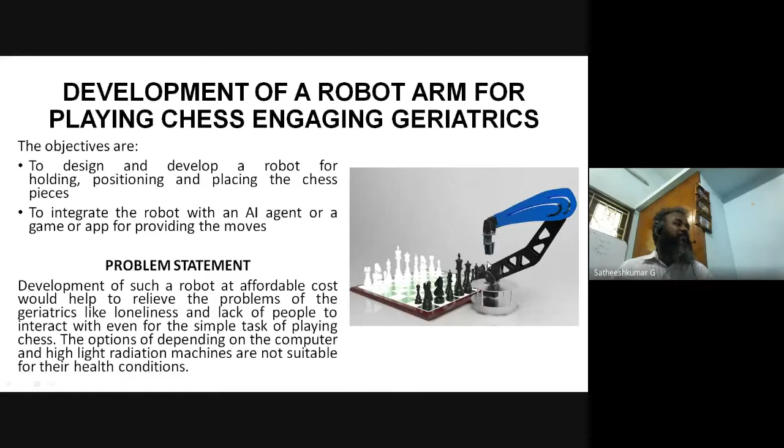So if I have a robot, it can at least give a feeling like some physical entity I'm playing with. Or if there is some other human being, he's controlling it using Internet of Things, so he can play with his friends, okay, for geriatric people. Yes, this is a much needed technology.

This SCARA, we made the construction using the pipes which are available for say electric pipelines in houses, okay, and Arduino. So anyone can do it on their own. This is like some of the projects my students are doing.

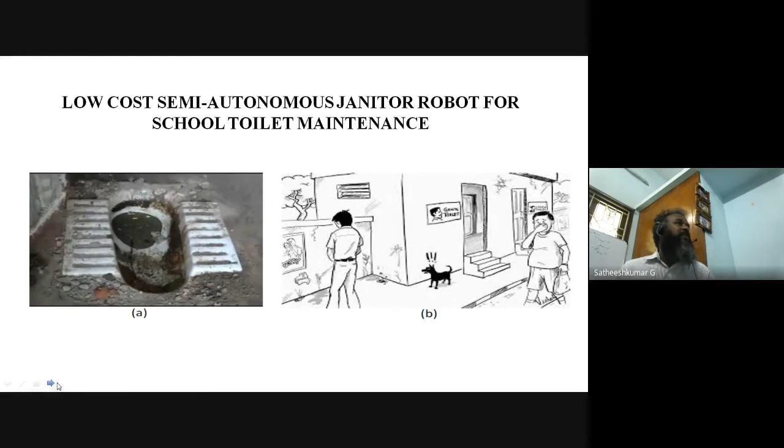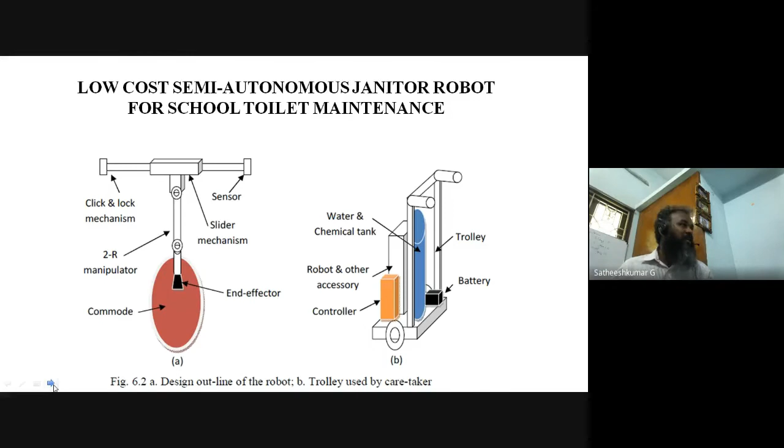Even in the current COVID condition, people are complaining about hospital toilets. Who will clean this? The doctors will come and clean this? Or our chief ministers should come and clean this? The sanitation worker, if he is already ill, affected by COVID, is he not a human being? Create some technology, make some robot which will clean this. What is so difficult in that? Let this be stuck to the wall on the left side and right side, okay, this keeps cleaning. This cannot take more than say 1,000 or 2,000 rupees. All that is missing is we engineers are not contributing to the immediate society. That is the truth, we have to accept that we are not doing it.

Very recently, wheelchair users, if they are not able to use their hands, they'll use a joystick kept here, and use their hands forward, backward. And there are people who cannot use the joystick either, but their wheelchair will have a joystick. What to do? Now we have developed a faculty in my college. She has developed the voice to motion control, voice to signal she converted, and we created a mechanical component, signal to motion for the joystick. So if he says go forward, that joystick will be pushed forward, backward, and all those things we did.

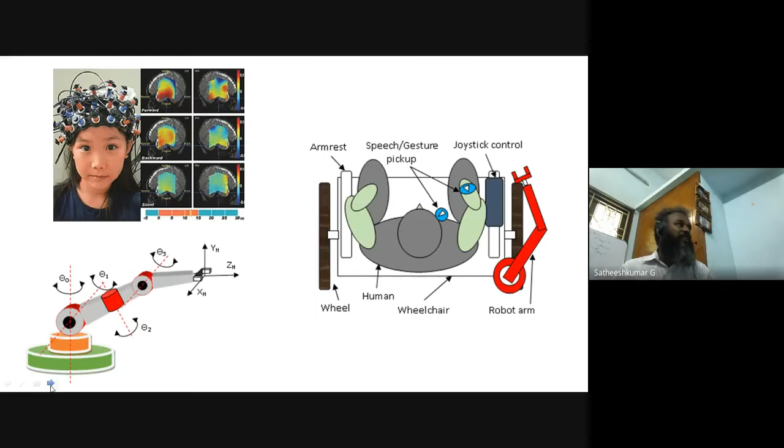Their robots had toy car motors, there'll be high speed motors, so they won the first race. Second race they had to slow down because of the maneuvers, we were equal. When it came to lifting the weight, their speed was so much, so torque was too low. They could lift only 200 grams, 400 grams, 800 grams. Our robot could lift 5 kgs of weight. Okay, so much is the mechanical advantage that you can get by working on the design aspects.

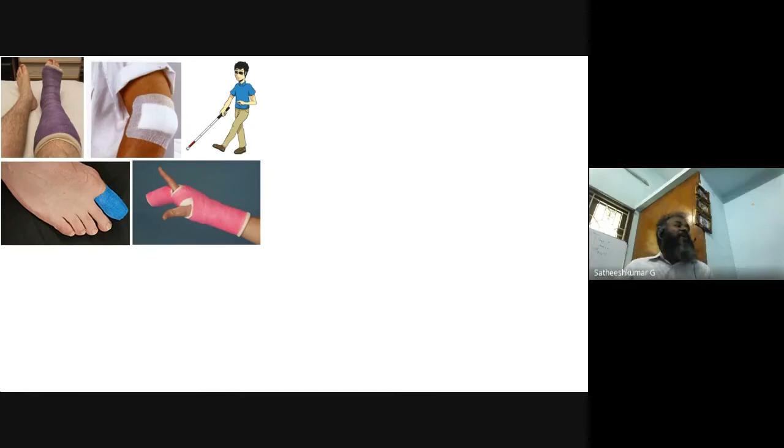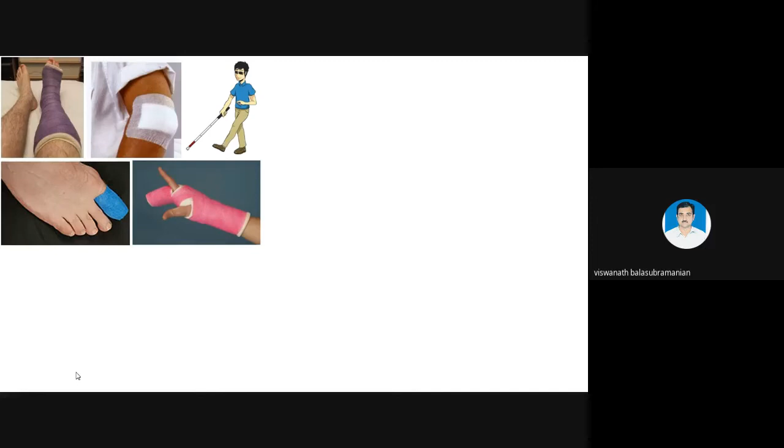So how about a siren? How do you know the presence of an ambulance? It's because of the siren and the lighting, right? So we minimized it, a miniaturized version, put a nano, Arduino Nano buzzer and everything, and on the backside a CMOS battery. For so many other applications, not just this, there were specific applications that we loaded the intelligence onto it with.

And say a specific tune. If A.R. Rahman can make a tune for Airtel, why not for all the people who need help? A specific tune. Once that tune is heard, everybody will know that some person in the vicinity needs my attention, not my help. They'll at least be alert.

So for this we have gone to file for a patent. Okay, we have filed it for a patent. Such a silly, simple device.

This will be having intelligence. Corporations are there, okay, everywhere they send sanitation workers to clean it. But if the dustbins also have intelligence at the ground level, you can do wonders. So this is like at the ground level.

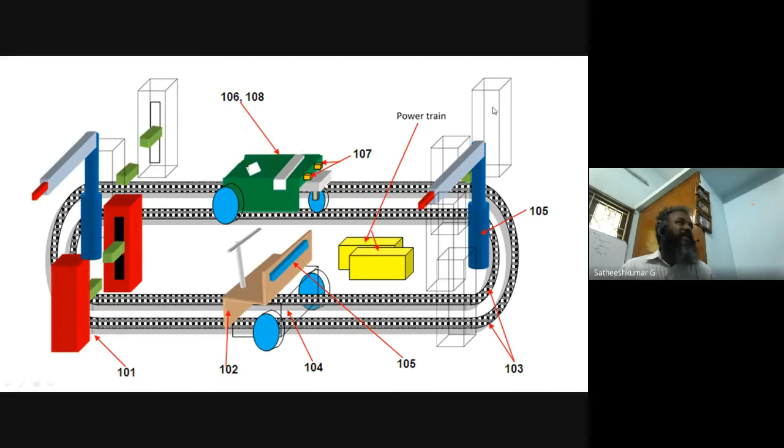This is like the first patent that I filed, for crossing the road. In a busy cross section, say accidents happen, and the vehicles have to stop and go. Instead, if the people are brought down to this level and transferred to the other side, sent across in some 5 to 10 seconds or 20 seconds time - yes, that is what this patent was all about.

Okay, why should I patent? Say, one of this guy, my friend - this is a common scenario in Alleppey, Kerala. They'll keep walking even if it rains, they keep walking and feed the coir, so their legs and hands will be hurt.

So he made a machine where you sit wherever you want, inside the home, outside, everywhere. You feed the coir, and the rope will be generated. He said everybody should get it free, I don't want to file a patent.

But in 2 days he realized, what if somebody else files a patent? Then nobody can get it free. That guy who files the patent determines the price. So he immediately went and filed a patent for that.

In IIT Madras, it was a coir rope making machine, and he also made an oil expeller. People making mixies and that kind of companies were ready to pay 50 lakhs and odd for getting that idea.

There are some things coming now in the market, but not up to the efficiency that he is showing for all the kinds of seeds that he is able to do.

Even now we are paying money for the bulb, that 100 watt 60 watt bulb. The royalty part of it goes to the company owned by Edison, they say.

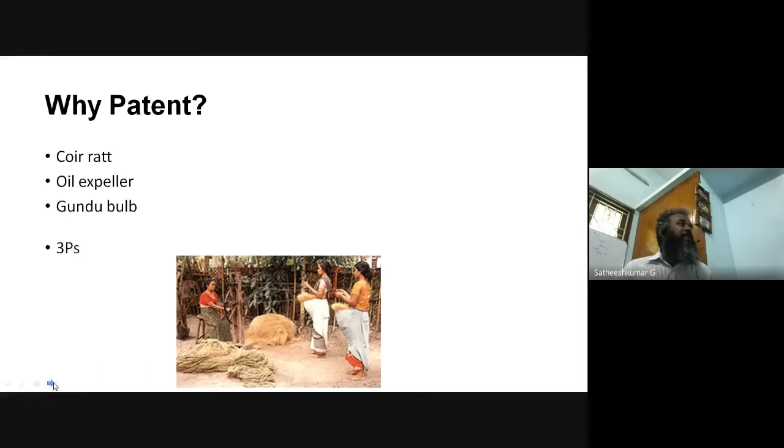And these days, patents, publishing and projects are the 3 P's that you should really be worried about on your resume. In order to build your resume, do some projects, apply your knowledge, get it published, or at least patent it. Once you have a patent, probably you can have your company also installed, you can incorporate a company and start building a company also.

So even IITs, NIRF, they have a very small number of patents, say probably 100 and less. I'm not proud about it, I'm not saying I feel bad about it either, but we are supposed to catch up.

So there is a huge area where we have to improve. The number of patents filed by an individual is like 2,000 plus per individual. It was Edison, with some 1,000 plus, till this guy took over. That is called intellectual property rights.

So if you want to file an intellectual property, file a patent, you can do it in 2 ways: provisional patent or consolidated patent. For a provisional patent, you download form 1 and form 2 from the internet, from this website. So you just have an idea. Today you got an idea, and you are afraid that tomorrow someone else might get the same idea and file it.

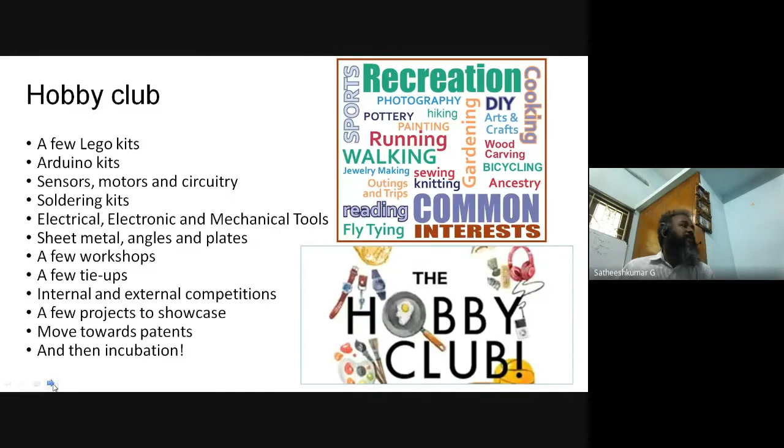You can create a hobby club also wherever you are. These days you are not going to college at all, you are stuck at home. So use the things available at home. Make your own garage or workshop at home and share it with your camera, so others can work and you can share their work, their tools available in their homes, and so on. Make the most of it. Technology will help us fight any kind of war, even the COVID war. Biologically they are fighting it, but we can also fight our own war, using technology towards education as well.

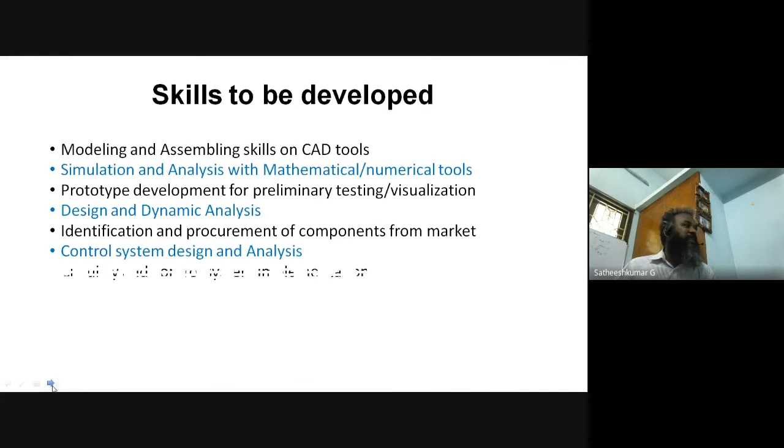That was it, sir, I think time is up. Is it all right? Shall I complete it now? Yes sir, yes sir, yes sir, you can, okay, finish it off, right?

I'm not going through these 2 slides. These are all the skills that are required. See, there are competitions run by government, not just this.

Toycathon is specific to toys, creating intelligent toys. You can apply the knowledge you learned with robotics to make such toys, and include your culture. These days gun is a culture, right? All the children play with guns, but is that our Indian culture? No, right? Let them play with guns too, but there are many other things we can pass down to the children. So those things we have to create. All the toys in the market are made by China or someone else, very few from India. You can tell by the look itself that it's not from India, and that is not fun at all.

Say we should feel bad. Engineers are supposed to play our role, but instead we are playing the role of cribbing people. We cry that roads are not good, government is not good, this facility is not there. We say, my faculty is not good, he is not teaching well, the infrastructure is not there in the college.

Forget all those things. To overcome that is engineering. Okay, problems will be there. Without problems, there is no country which has grown into a developed country. With all those problems, how did they learn their knowledge and apply it then and there? Today I learned about Varignon's theorem. How did I apply it for my society or a practical application? Unless you connect that, forget growth for India.